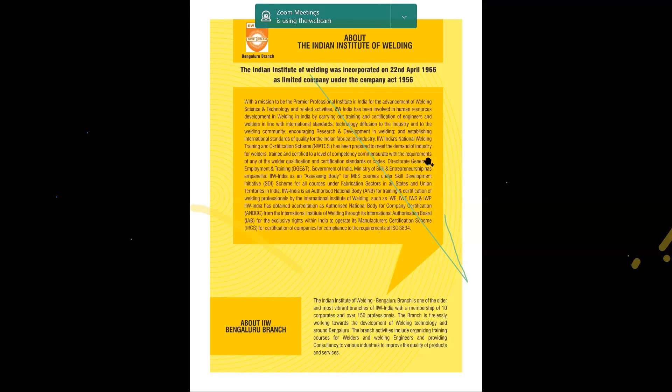Someone is screen sharing. Please don't screen share.

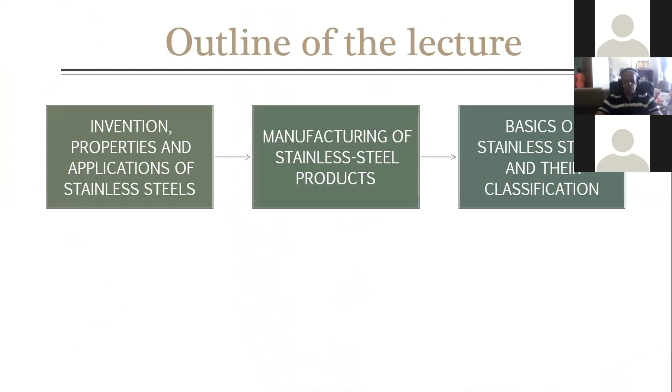Thank you for the introduction, Shukumar sir. I welcome all the delegates of the Indian Institute of Welding, Bangalore chapter, to this technical talk on physical metallurgy of stainless steels. I'll be focusing on the physical metallurgy of austenitic stainless steels for today's talk. Regarding the outline of my presentation, I'll briefly cover the history, properties, and applications of stainless steels, how stainless steels are manufactured, and the basics of stainless steels and their classification.

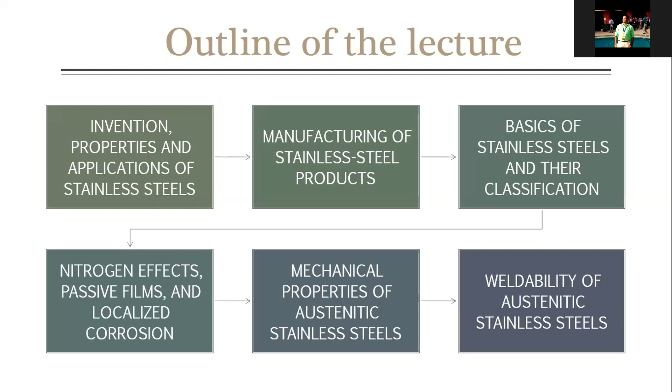I'll also brief about the nitrogen effects, passivation, and localized corrosion that occurs in austenitic stainless steels, and I'll discuss the mechanical properties and weldability of austenitic stainless steels.

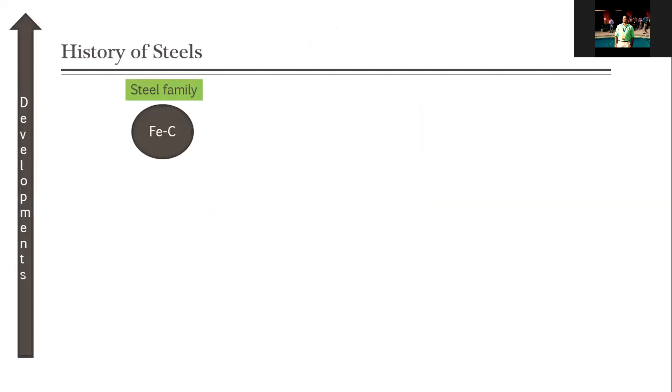Coming to the history, in the steel family, we have three types of steels: carbon steels, stainless steels, and low alloy steels.

A scientist named Harry Brearley invented stainless steels. Actually, austenitic stainless steel was invented in the years 1912 to 1914.

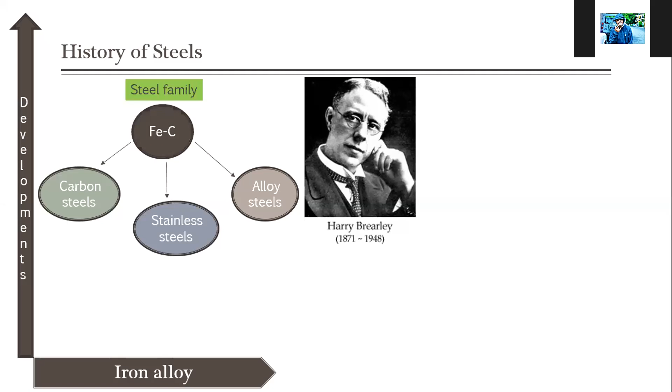Coming to the developments in iron alloy, prehistoric iron is evident in Delhi's iron pillar from around 400 AD, which consisted of iron, carbon, phosphorus, sulfur, and manganese alloy. Coming to further development, iron carbon steels were developed.

After that, alloy steels were developed in the 19th century, and the first patent was made in 1872 for high carbon and high chromium alloy steel. Later, in 1875, low carbon and high chromium steels were developed by Brustlein.

The aluminothermic reduction, that is reduction of carbon in stainless steels, was done in the year 1895 by the scientist called Goldschmidt. Because of this invention, it led to the breakthrough of reducing the carbon content in stainless steel.

Later, further developments were done by adding ternary alloys, that is iron, nickel, and chromium alloys, developed by Guillet in 1904 to 1906.

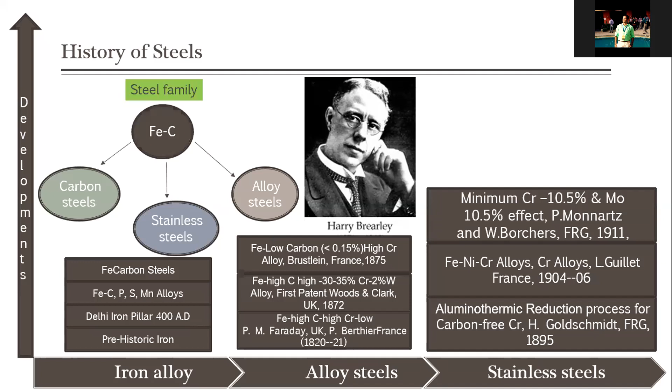Later, molybdenum with increasing chromium content about 10.5%, and its effects, was investigated by Monnartz and Borchers. And later in 1913, the first ever stainless steel was invented by Harry Brearley, as I told you.

Austenitic stainless steel was invented in the years 1912 to 1914 by adding 15 to 40% of chromium, by the scientist named B. Strauss. He invented the stainless steel with the composition of carbon less than 1%, nickel less than 20%, and chromium around 15 to 40%.

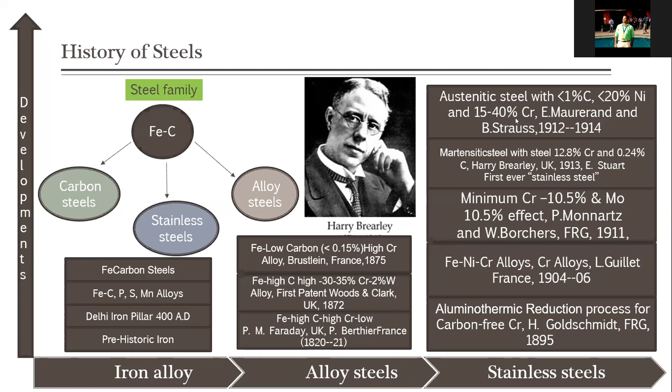This is the brief history of steels.

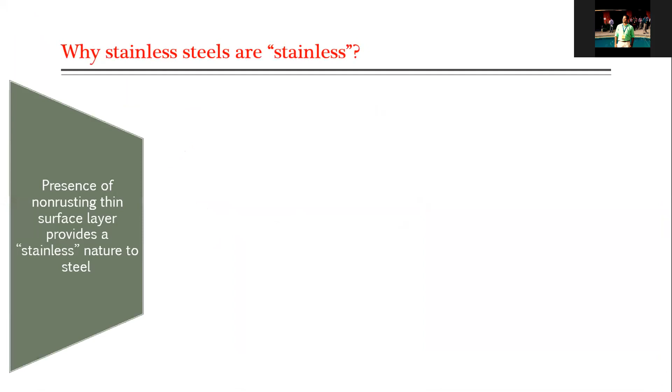And why are steels called stainless? We need to know that steels have a passive layer. The presence of this passive film, which is made up of chromium oxide, makes it stainless and rust free.

Chromium content less than 10.5% makes it not possible to have a passive film; it should have more than 10.5%. In any steel, when chromium content is above 10.5%, we can form a passive layer.

I'll explain later what this passive film is, in the passivation process.

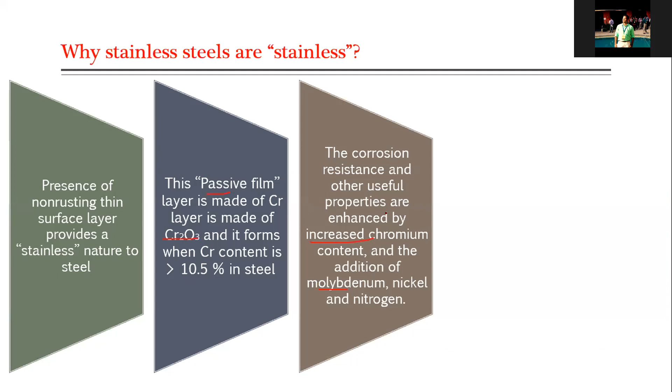The corrosion resistance and other useful properties are enhanced by adding chromium content in steels, and in turn, adding other alloying elements like molybdenum, nickel, and nitrogen will also enhance the corrosion resistance and mechanical properties of stainless steels.

We can see an article from 1915 when stainless steels were invented. According to the author, a non-rusting, unstainable, untarnishable stainless steel was founded, which did not require any polish. This was an article published in the New York Times in 1915 regarding stainless steels.

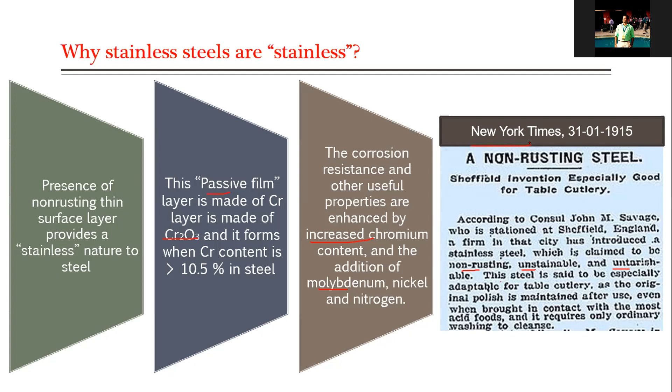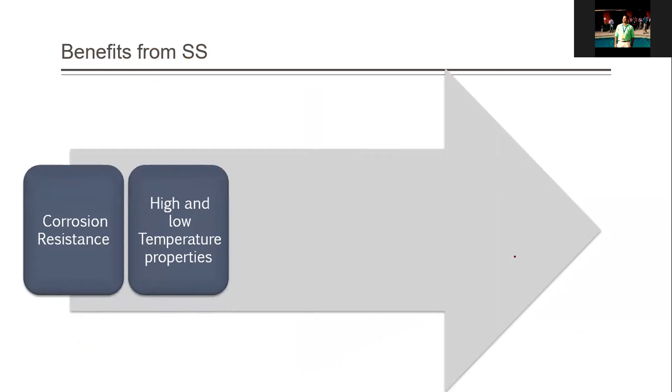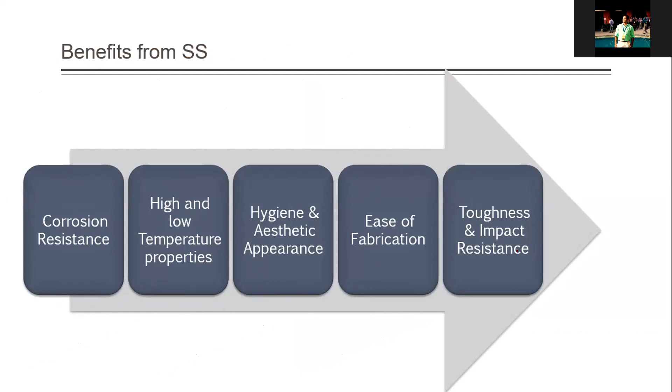Coming to the benefits of stainless steel: it has very good corrosion resistance, very good high and low temperature properties, hygienic and aesthetic appearance, and is easy to fabricate. It is a good formable material, toughness is very good, impact resistance is very good, and cost and life cycle cost is also good. Coming to fatigue property, it has very good creep and fatigue properties also.

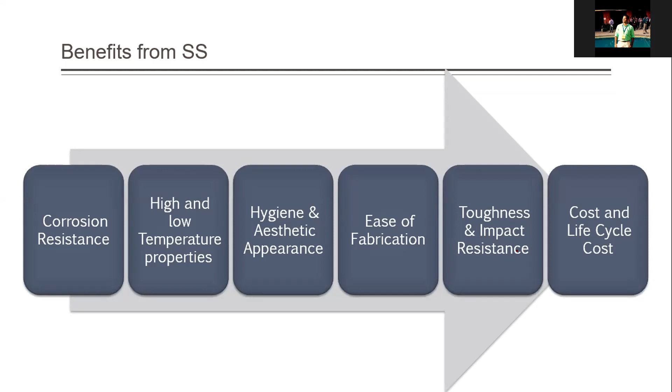Nowadays we can see stainless steel everywhere, right from construction to coins, automobiles, and even in our utensils. Everywhere we can see stainless steels. It has a lot of applications.

We have it in marine applications, desalination plants, petrochemical industries, oil and pulp industries. Wherever we require non-corrosive properties, wherever the environment is corrosive, we usually prefer stainless steels.

Coming to the classification of stainless steels, usually we have 5 types: ferritic stainless steels, martensitic stainless steels, austenitic stainless steels, precipitation hardening stainless steels, and duplex stainless steels.

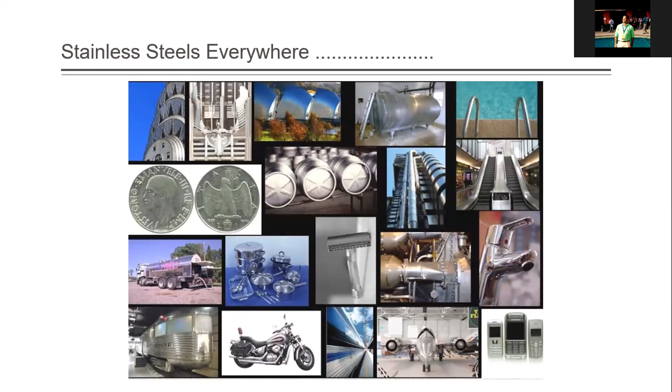Is it visible now? Sorry? Is the screen visible now? Yeah, the classification of stainless steel is not visible. Yeah, I'll come to that. I was talking in general. Yeah. Now it is in. Coming to manufacturing of stainless steel. Yeah. You can go ahead, Dr. Shamant. You can go ahead.

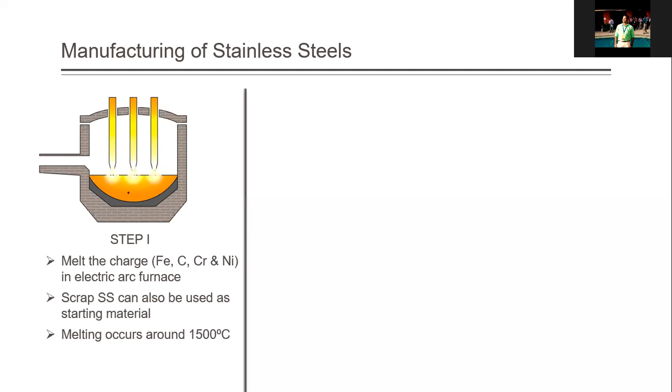Coming to the manufacturing of stainless steels, in general, we use an electric arc furnace in order to cast the stainless steel. The charge will be melted by using the electric arc, and scrap stainless steel also can be used as a metal charge. Melting occurs around 1500 degrees centigrade. Later, after melting, it will be decarburized. That's the main process in stainless steel. We have to remove all the carbon content present in it. Why we have to remove the carbon content, I'll explain later.

Once you melt the charge in your electric arc furnace, it will be transferred to the decarburization vessel, where you blow oxygen, argon, and nitrogen gas in order to reduce the carbon content. We have to reduce the carbon content because of the sensitization problem which occurs in stainless steel. The maximum amount of carbon is limited to 0.03% in the case of austenitic stainless steel. Addition of alloying elements is done in this stage in order to compensate for the effect of carbon.

After decarburization comes solidification. We do the hot rolling process, and then we cut the metal samples. In the case of continuous casting, we do this. And if you require permanent mold casting, the process can be simplified further.

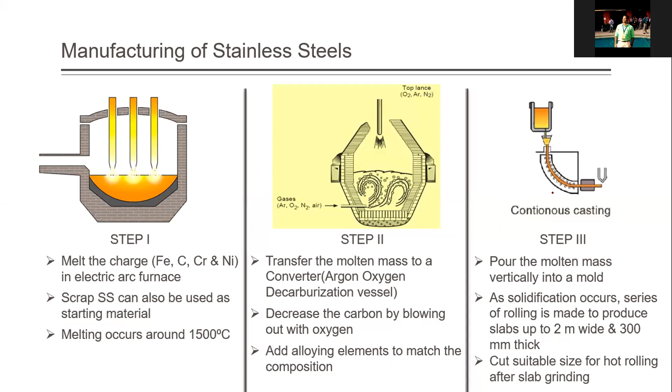Coming to this, in stainless steel it's because of the allotropic nature of iron. Allotropic nature means iron has the capability to change its crystal structure when heated at different temperatures. Say it exists as BCC. When you heat it above 1390 degrees, it exists in delta ferrite form with carbon. If it is heated in the range of 910 to 1390, it exists in the form of austenite with carbon. This is the section where we deal with stainless steels.

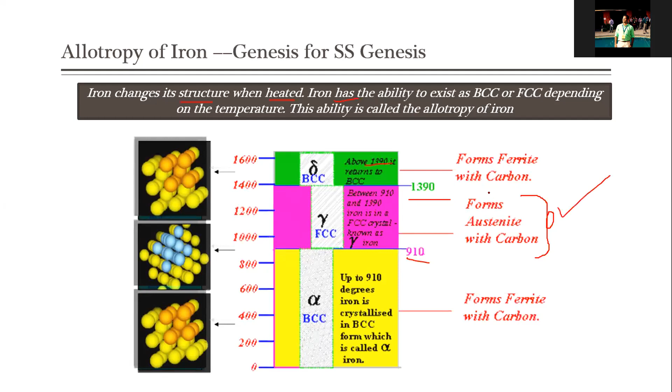We usually have an FCC structure which is non-magnetic. Stainless steels usually come under this category, that is FCC structures. When it is below 900 degrees centigrade, it exists in the form of alpha ferrite. Our focus area is this region, 1000 to 1300 or 1400 degrees centigrade, the range required to produce our austenitic stainless steels.

Coming to the classification, as I told you, there are austenitic stainless steels, ferritic stainless steels, martensitic stainless steels, precipitation hardening stainless steels, and duplex stainless steels. The percentages I've shown here are the market shares in the international market. Usually, austenitic stainless steel has 65 to 70% of the world market share. Next comes ferritic stainless steels, with a market share of 20 to 25%.

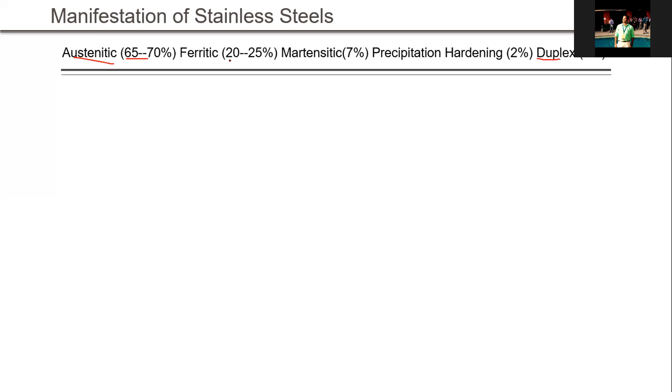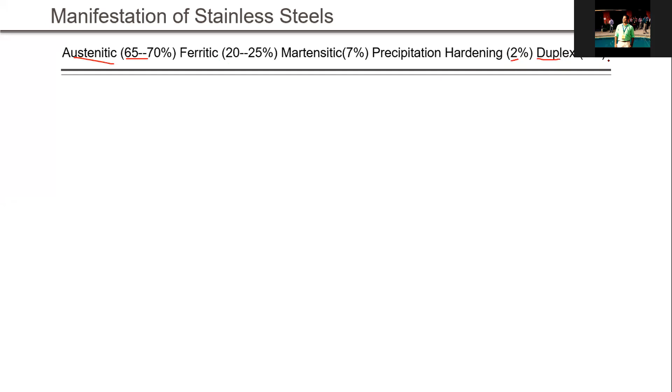Martensitic stainless steels have a market share of 7%. Precipitation hardening stainless steels have a market share of around 2%. Duplex steel has a market share of 1%. Since it is a newly developed alloy, the market share of duplex alloy is on the lower side. It is a recently developed alloy.

If you have chromium between 12 to 15%, then you get martensitic stainless steel. This type of phase is very helpful in enhancing strength and toughness. If you have the martensitic phase in your structure, then it is hardenable. It is heat treatable also. You can harden it.

Coming to ferritic stainless steels, when you maintain carbon less than 0.1%, chromium more than 18%, and no nickel, you arrive at a ferritic structure. In austenitic stainless steels also, you will have 5 to 10% ferritic structure: 90% will be austenitic phase and 10% ferritic phase. In ferritic stainless steels, 90% of your structure is made up of ferrite.

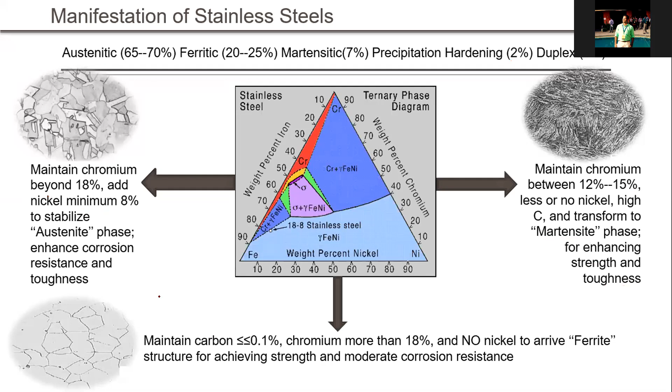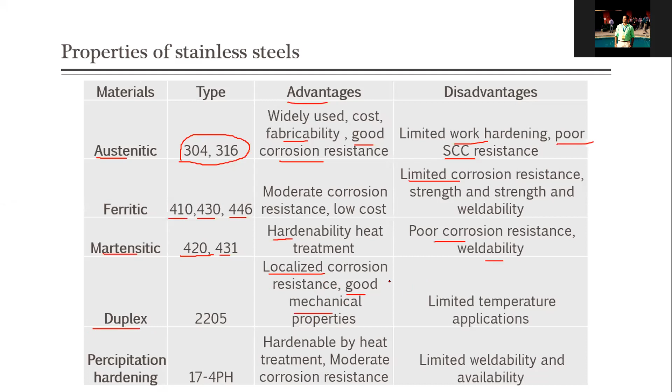And coming to the newly developed duplex alloy steel, it has very good localized corrosion resistance. That is, resistance to pitting and crevice corrosion is very good in duplex stainless steels, and it has good mechanical properties also. When compared to austenitic stainless steels, the mechanical property of duplex stainless steels is very good, and the corrosion resistance also is very good. The only limitation of duplex stainless steel is its limited operating service temperature.

Austenitic stainless steel's operating or service temperature is around 800 degrees, whereas in duplex steels it is limited to 300 degrees. Above 300 degrees, we cannot rely on duplex stainless steel because various precipitates form above 300 degrees centigrade in duplex stainless steel. Hence, this is the major limitation of duplex stainless steels compared to austenitic stainless steel. Comparing corrosion resistance, it has very good corrosion resistance because of enhanced chromium content in it.

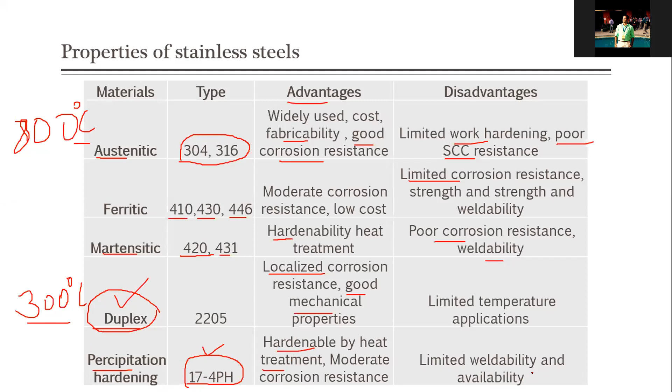And next we have precipitation hardening steels, where the commonly used grade is 17-4 PH. This is the commonly used precipitation hardened steel, and it is hardenable by heat treatment. The main advantage of precipitation hardening steel is it can be hardened by heat treatment, and it has moderate corrosion resistance. The major limitation is it has limited weldability, and availability is also very limited. This is the property of stainless steel.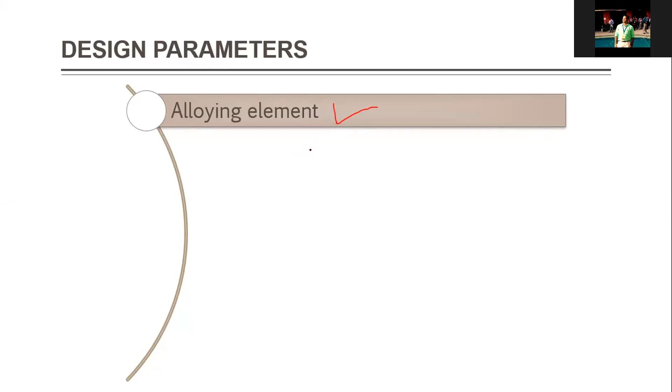And coming to the design parameters of austenitic stainless steel, alloying element is the first part in designing any alloy or any stainless steel. Alloying element is the first important criterion that we have to look into. I'll be discussing in detail the effect of alloying elements. And grain size: grain size engineering is also very important in defining the corrosion and mechanical properties.

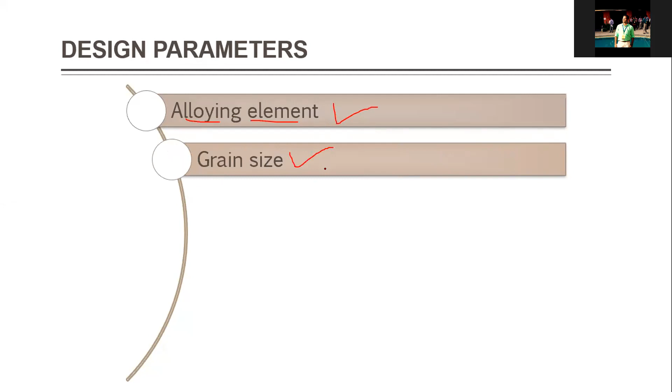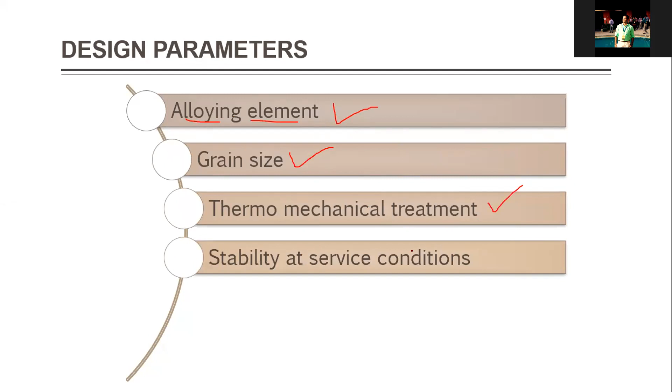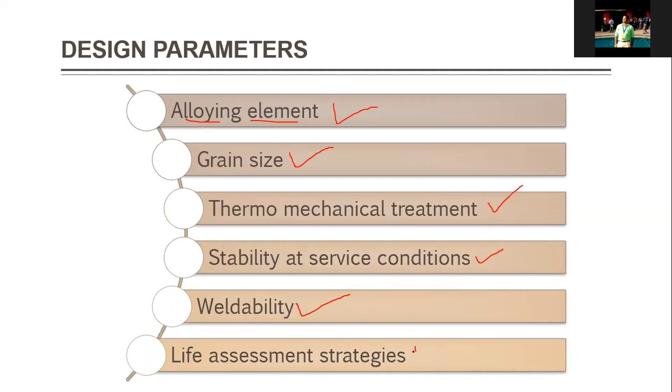And thermomechanical heat treatment. Heat treatment is also very important in designing a stainless steel for a particular application. And stability at service conditions also has to be checked before using it in working condition. And weldability of the alloy being designed should also be checked thoroughly. And life assessment strategies like fatigue and creep should also be very good before designing the alloy.

Coming to the effect of alloying elements, the first thing is carbon. Carbon is usually present in all ferrous metals, and usually carbon is added around 0.02 to 0.05%. 0.08% of carbon is present in austenitic stainless steel, and carbon, as we all know, is a non-metallic element. As you can see in this image, this is a graphite flake, image courtesy of Mines Paris. And carbon, as I told you, will always be present in metallic alloys, in all grades of stainless steels and heat resistant steels.

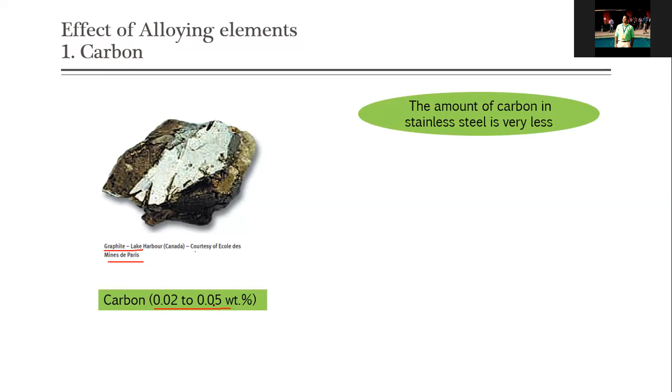You usually have carbon, but in case of austenitic, ferritic, and duplex stainless steels, the maximum amount of carbon is limited to 0.05%. Sorry, 0.01%. Okay, and coming to austenitic stainless steels, you can find carbon in the range of 0.02 to 0.05%. And carbon is not essential in stainless steel because of sensitization problem.

Because if you have more carbon in your alloy, what happens is it extracts all the chromium content in it to form the chromium carbide precipitates near the grain boundaries. Hence, carbon is completely eliminated from stainless steels. If you have this sensitization problem, then you will have decrease in corrosion resistant property. Hence carbon is avoided in stainless steels. The amount of carbon will be very less in stainless steels.

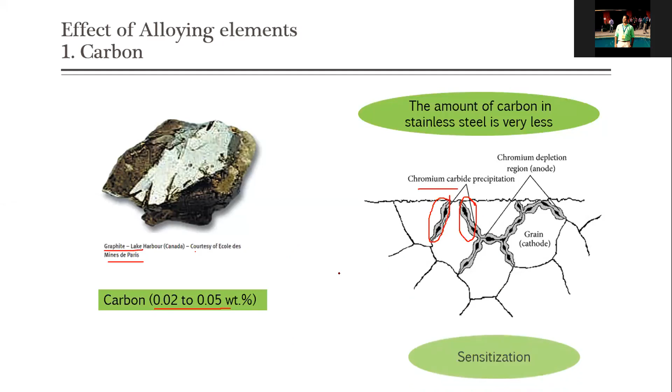Coming to the chromium content, chromium is a very important alloying element in stainless steel. You can see the image of chromite ore, which is again taken from the Paris mines. The chromium content in austenitic stainless steel is present around 16 to 18%. Coming to the metallurgical application of chromium, about 85% of chromite mine is used in metallurgy, namely in stainless steels or low alloy steels, high strength steels, tool steels, and high performance alloy steels. Because of its high resistance to corrosion, this is a very important alloying element in stainless steels.

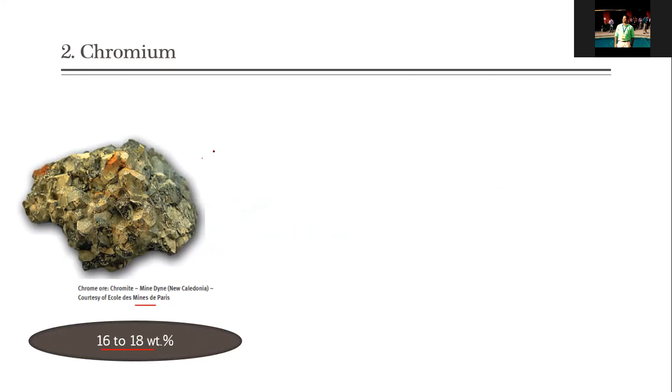One way that we can distinguish stainless steels is by the amount of chromium content in it. Usually the chromium content present in it will give us a protective layer called passive layer, which is protecting the stainless steels from corrosion. Chromium is having high degree of reactivity. On this basis, the effectiveness of chromium as an alloying element in stainless steel is very important.

The resistance of these metallic alloys to chemical effects of corrosive agents is determined by the ability to protect themselves through the formation of adherent and insoluble film, that is, chromium oxide layer. That process you usually call the passivation process. Once your chromium atom reacts with oxygen, when you subject it to atmosphere, you will have a thin oxide layer formed on the surface of the steel, and that layer will be in the nano level, around 0.1 to 2 nanometers.

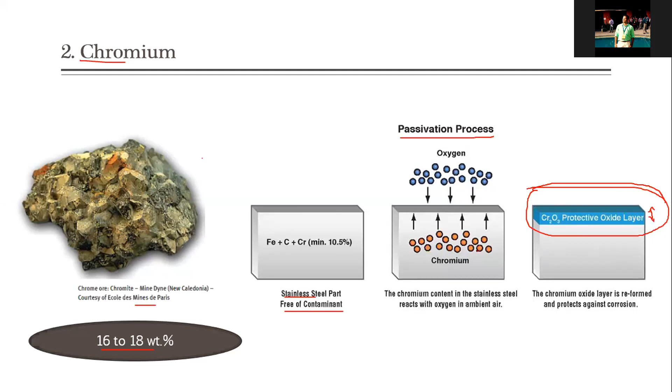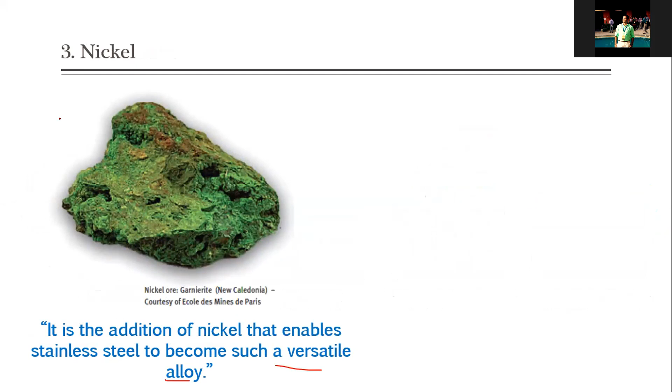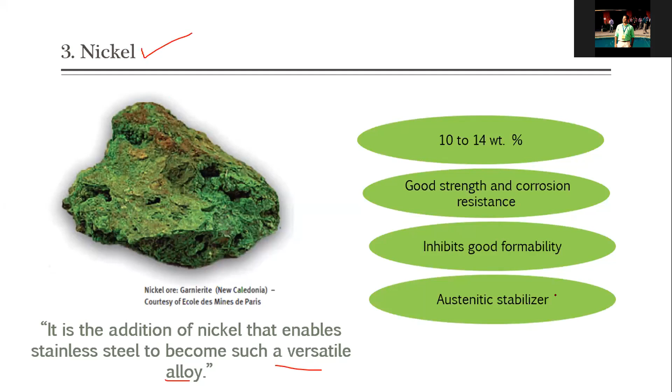The next important alloying element that we find in austenitic stainless steel is nickel. It is the addition of nickel that enables stainless steel to become such a versatile alloy. Usually you have 10 to 14% of nickel content in austenitic stainless steel, which enables it to have good strength and corrosion resistance, and it also gives good formability. The machinability property of austenitic stainless steel is affected by addition of nickel, and it is a major austenite stabilizer.

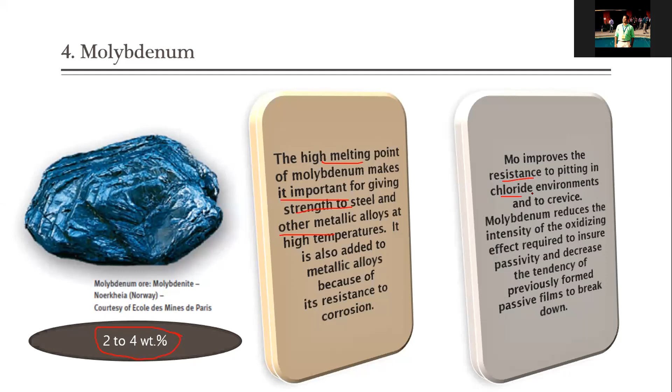Coming to molybdenum, usually you have around 2 to 4 weight percent of molybdenum in austenitic stainless steel, and molybdenum has a very high melting point. Because of this property, it is important for giving strength to the steel and other metallic alloys, and it also helps in providing good corrosion resistance. Molybdenum improves the resistance to pitting in chloride environments and crevice corrosion, and it helps in reducing the oxidizing effect.

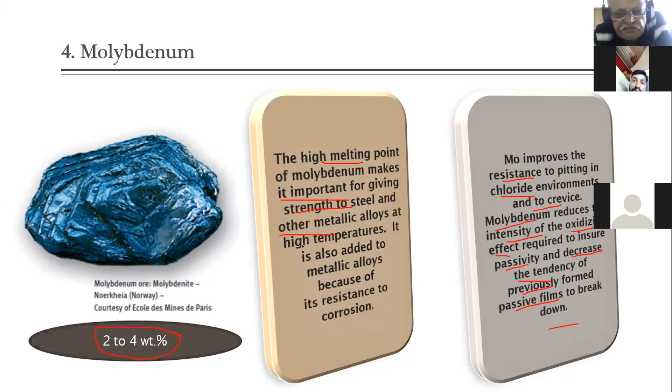Molybdenum will also help in reducing the intensity of oxidizing effect, which is very much essential to ensure passivity and decrease the tendency of previously formed passive films to break down. If you have molybdenum content in your stainless steel, then the passive layer will also be very strong. And the next important alloying element is nitrogen. Nitrogen is an interstitial element in steel, as we all know.

And sorry, because the size of the nitrogen atom is so small compared to the size of chromium or nickel or iron, it is very small. The atomic size of nitrogen is very small. Hence, it is an interstitial atom which can enter into these alloys.

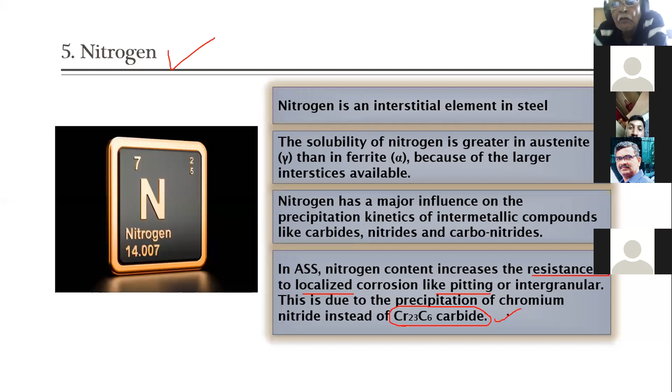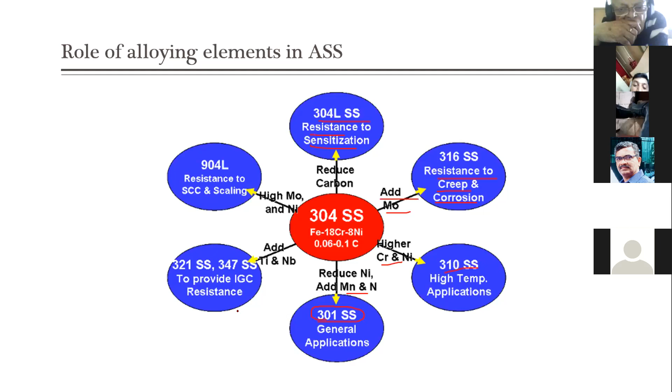If you have higher chromium and nickel, then you get 310 SS, which has high temperature applications. If you reduce nickel and add manganese and nitrogen, then you get 301 stainless steel, which is used in general applications, and the cost of 301 stainless steel is also very low. If you add other alloying elements like titanium and niobium, you get 321 SS and 347 SS, which have very good intergranular corrosion resistance.

If you add molybdenum and nickel to the 304 alloy, then you get the 904L grade, which has good resistance to stress corrosion cracking and scaling. These are some of the commonly used grades of austenitic stainless steels. If you have lower carbon, you get 304L. If you have more molybdenum, you will have 316 SS. And if you have higher chromium and nickel compared to 304, you will have 310 SS.

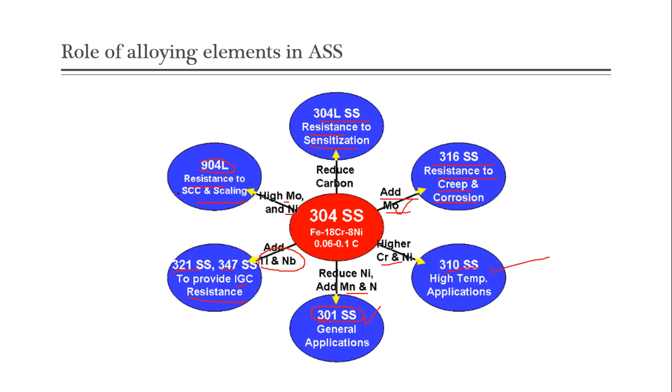If you have reduced nickel and increased nitrogen, then you get 301 SS. If you add titanium and niobium to your iron, chromium, and nickel alloy, then you get 321 SS and 347 SS. And if you have high molybdenum and nickel content, then you get 904L SS, which has very good resistance to stress corrosion cracking and scaling.

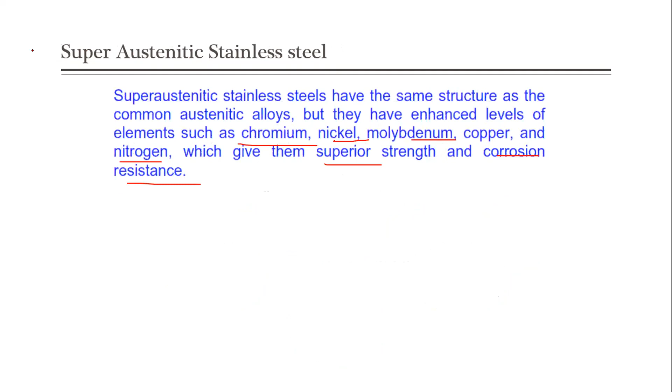The next important austenitic stainless steel we have is super austenitic stainless steel. It has a microstructure similar to the austenitic alloy, but alloying elements such as chromium, nickel, molybdenum, copper, and nitrogen are enhanced in order to get superior strength and corrosion resistance. The cost of super austenitic stainless steels will also be on the higher side. You can see the alloying elements that you can add.

See, around 23 to 25% nickel will be added, whereas in conventional 316 ASS, the nickel is limited to 10%, whereas in super austenitic stainless steel, the nickel content will be around 23 to 25%. And the chromium content also is enhanced: in commonly used 316 alloy, you will have around 18% of chromium. Here you will have 22% of chromium.

And the molybdenum also is increased in super austenitic stainless steel. Here you are adding around 6 to 7% of molybdenum, whereas in conventional 316 alloy, it will be around 3 to 4% of molybdenum. And you will have almost nil carbon in super austenitic stainless steel. The maximum amount will be around 0.03%, and nitrogen will be around 0.18 to 0.25%. In case of 316, you will have nitrogen content around 0.15%, and the rest are nil. If you have any specific application which requires toughness, then you add some amount of manganese also.

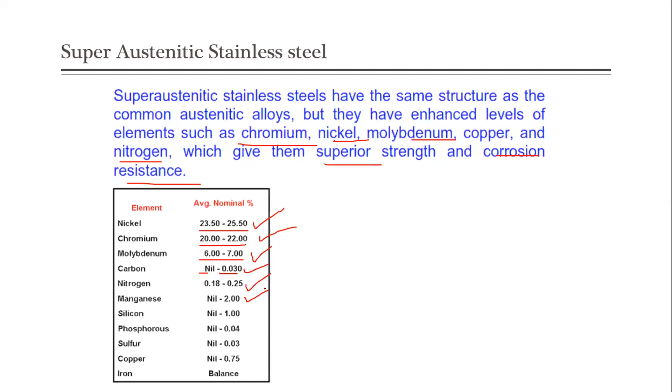Typical applications of super austenitic stainless steel are in pulp bleaching equipment and piping, seawater exchangers, chemical process tanks, pipelines, brewery equipment, reverse osmosis desalination equipment and pumps. It is also being used in offshore oil and gas process systems, food processing equipment, and pharmaceutical process pipelines and vessels. Where you need superior corrosion resistance and strength, you use these super austenitic stainless steels.

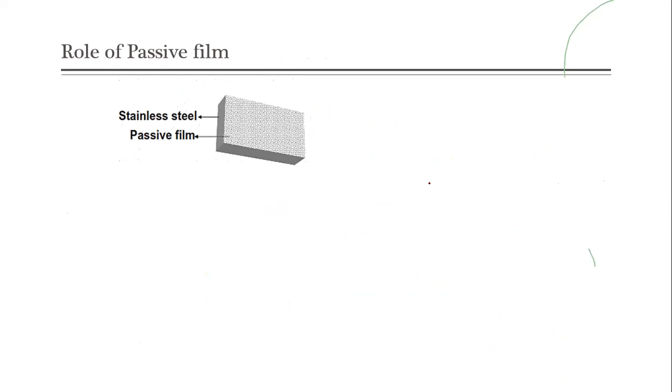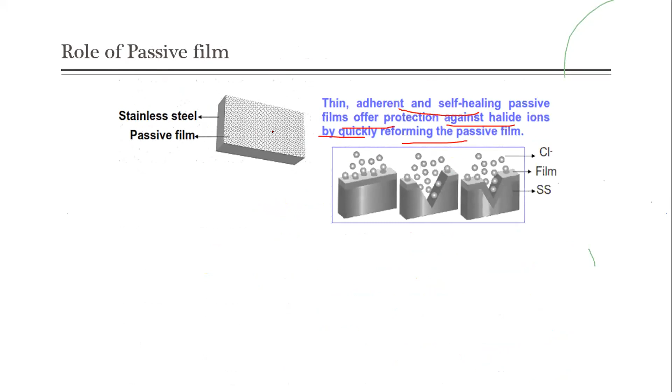As I told you, the role of the passive film is very important in stainless steel. Here a thin and self-healing passive film protects against aggressive ions by quickly re-forming. This self-healing passive film protects the surface from surface damage and localized corrosion. It helps in preventing minor surface damage and greatly helps in increasing the localized corrosion resistance, because the passive film will be corroded first, and then the corrosion will enter into our base metal.

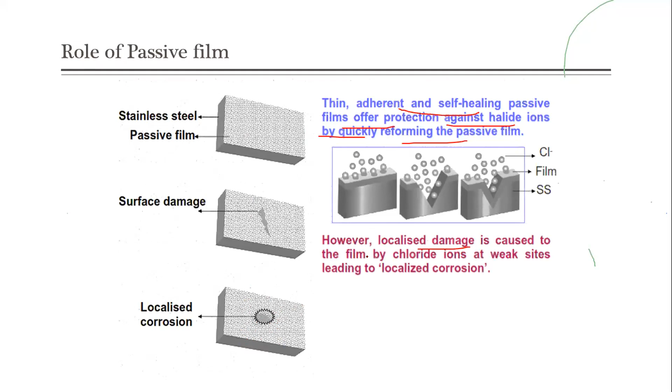However, localized damage is caused to the film by chloride ions at weak sites. This localized corrosion is usually found in the weak sites of the passive film. Localized corrosion like pitting and crevice corrosion, intergranular corrosion, stress corrosion cracking, corrosion fatigue, etc. are caused due to the destruction of the passive film. In ASS, in order to have damage due to corrosion and fatigue, first you have to overcome this passive layer. Only after destruction of this passive film will the failure of our SS occur.

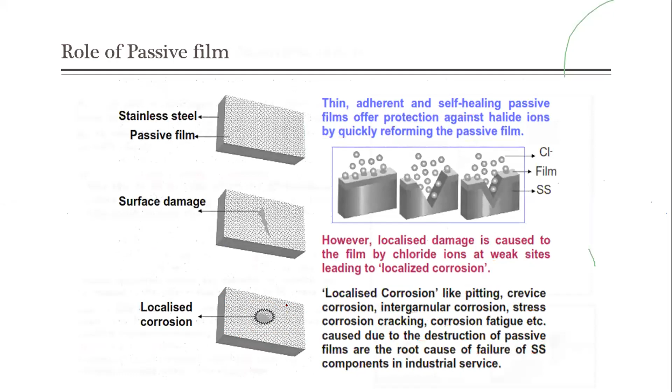In industrial services, coming to pitting corrosion, the passive film is damaged by chloride ions. Usually the stainless steels will be subjected to corrosive environments. Wherever you have aggressive environments, you use these stainless steels, right? The passive film generated in the austenitic stainless steels will be damaged by the chloride ions at local defects, and pitting is initiated, and it grows by an autocatalytic mechanism, leading to the growth of pits.

How to improve pitting corrosion resistance is by adding molybdenum, nickel, and nitrogen. If you have more molybdenum, nitrogen, and nickel in your alloy system, then the pitting corrosion kinetics will be reduced. You can also do some surface treatment, like laser melting or surface alloying, in order to reduce this pitting. And you can also add inhibitor to the corrosive medium in order to reduce the pitting corrosion.

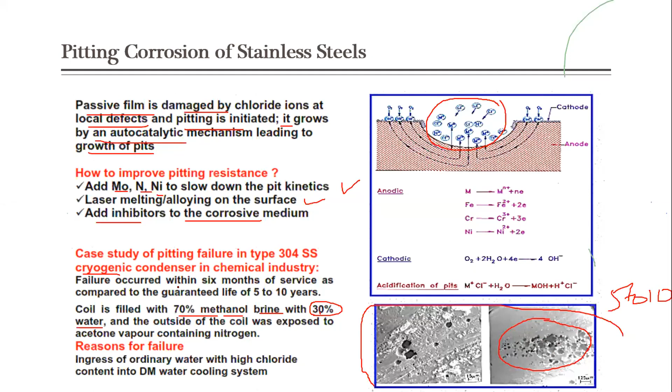Coming to intergranular corrosion, it mainly occurs because of sensitization. Formation of chromium-rich carbides at the grain boundaries during slow heating or cooling of austenitic stainless steels between 400 to 750 degrees centigrade leads to the development of a chromium-depleted zone, which is a sensitized layer along the grain boundaries known as sensitization. This intergranular corrosion mainly occurs because of sensitization.

Any sensitized microstructure will undergo selective localized corrosion. If you have a sensitized layer or a sensitized structure in your microstructure, it tends to have intergranular corrosion in austenitic stainless steels.

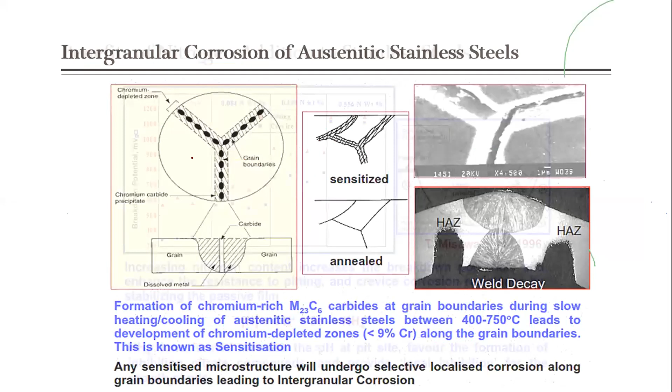If you increase the nitrogen content, the enhanced breakdown potential will be increased, which will in turn enhance the resistance to pitting and crevice corrosion by stabilizing the passive film. If you add more nitrogen into your alloy, you will have a strong passive film that cannot be corroded easily. Usually, if you have higher nitrogen content, you can form NH4 ions.

This increases pH at the pit site, which will favor the formation of nitrate compounds and provide local inhibition for the growth of pits. Hence, nitrogen is a very important alloying element in stainless steel.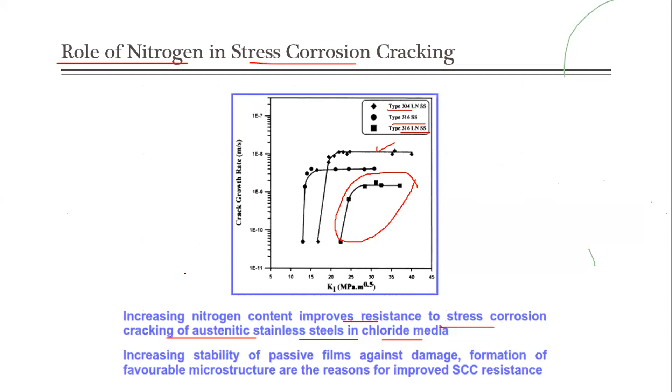Increasing the nitrogen content improves the resistance to stress corrosion cracking in austenitic stainless steels in chloride medium. If you increase the nitrogen content, you will have very good resistance to stress corrosion cracking, and also increase the stability of the passive film against damage. You can get a favorable microstructure for good stress corrosion cracking resistance if you have higher nitrogen content in your austenitic stainless steels.

Coming to intergranular corrosion, here you can see the TTT diagram, that is time-temperature-transformation diagram, for 0% cold work, 5% cold work, and 10% cold work samples. The carbon and nitrogen contents have been taken here: the first indicates 0.054% carbon and 0.053% nitrogen, that is 316 alloy, where they designed for different amounts of carbon and nitrogen.

For the second alloy, they chose 0.043% carbon and 0.075% nitrogen. For the third alloy, they chose 0.03% carbon and 0.086% nitrogen. They studied the time transformation curves for 0%, 5%, and 10% cold work.

They found cold working up to 15% reduces the time to initiate sensitization. Hence, we have to cold work the austenitic stainless steel sample, which in turn reduces the time to initiate sensitization. Reduction in carbon and addition of nitrogen increases the transformation time.

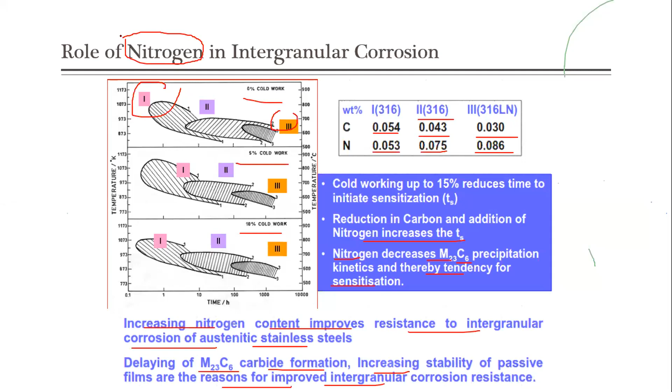Increasing nitrogen content improves the resistance to intergranular corrosion of austenitic stainless steels, and it also helps in delaying carbide formation. It increases the stability of passive films, and the reason for improved intergranular corrosion resistance is the addition of this nitrogen atom. Nitrogen is a very important alloying element for enhancing the corrosion resistance of austenitic stainless steels.

Coming to grain boundary engineering, as you can see in this image, if you have uniform grain boundaries, the sensitization time required is 200 hours. If you have non-uniform grain boundaries, the sensitization time required is more than 2000 hours. Hence, while designing an alloy to have good corrosion resistance, we should have non-uniform grain size. If you have uniform grain size, then the tendency for sensitization will be more.

They took two alloys and chose an intermediate warm working temperature during the annealing and rolling process. They engineered one alloy to have uniform grain size, and with the same working condition, they engineered the other for non-uniform grain size by selecting proper temperatures. Grain boundary engineering is thus very important to minimize the sensitization problem.

The percentage of coincidence site lattice, which we usually call CSL, will be increased to 70% in alloy B, whereas the time for sensitization also increased by 10 times. If you have non-uniform grain boundaries, the time for sensitization required is also increased by 10 times. Sensitization resistance increases with the increase in low angle coherent boundaries, which also help in increasing the sensitization time.

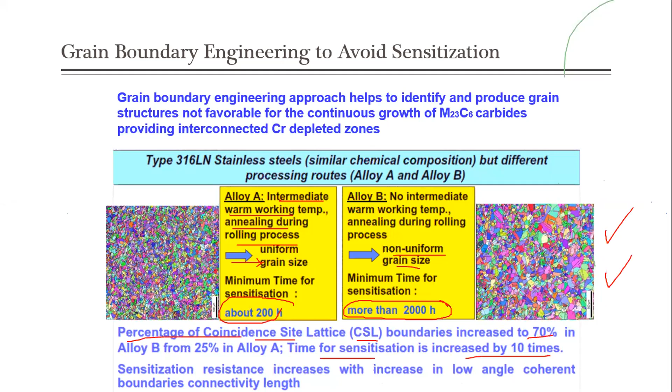The next important problem associated with austenitic stainless steel is biocorrosion, commonly called MIC, that is microbiologically influenced corrosion, caused by bacteria or atmospheric conditions where these austenitic stainless steels are being used. They usually tend to have biocorrosion on them.

Here you can see some corrosion that has happened due to Gallionella bacteria, and the biofilm formed because of it. This occurs when we subject the steel to a highly aggressive environment. Usually the applications of austenitic stainless steels are in aggressive environments with a lot of carbohydrates present, such as food processing industries and some other industries, where you will have a lot of bacteria influencing the corrosion attack, which we call microbiologically influenced corrosion.

You will have bacteria doing immobilization on the passive film, forming a biofilm over it, which in turn causes crevice attack on the sample. These are some examples where we see biocorrosion. Here you can see biocorrosion on the SS weld also, because of Gallionella mounds present, which is a main bacteria causing corrosion in our welds.

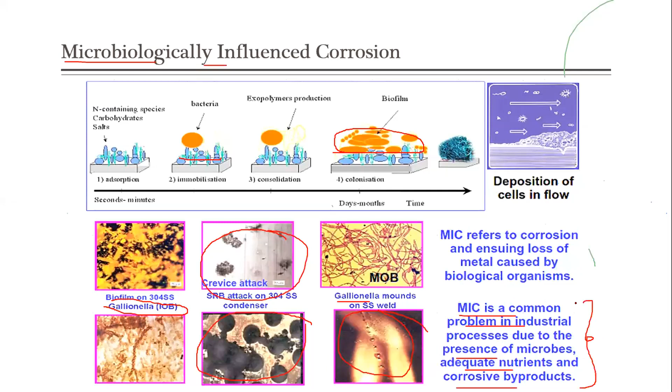Coming to the mechanical properties of austenitic stainless steels, usually we have a yield strength and tensile strength of around 480 to 600 MPa. As you can see in this stress-strain curve, austenitic stainless steel has good ductility. Coming to the strength part, usually our martensitic stainless steel has very good strength, whereas coming to formability or ductility, austenitic stainless steel has the good ductility part.

Usually it has a yield strength of around 300 and tensile strength around 580 to 600, and this again depends upon the alloying elements. The percentage of elongation and the strength depend upon the alloying elements again. If you have more molybdenum, you get good tensile strength; if you have lesser molybdenum, the tensile strength will be less. You can also add manganese into the alloying elements in order to increase the strength properties.

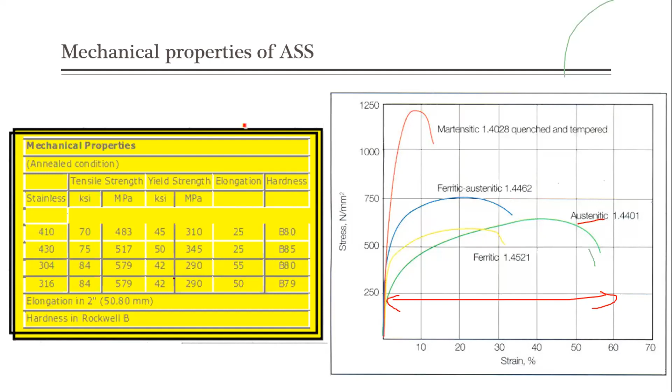You can see in this diagram the increasing corrosion resistance versus increasing strength for the various grades available for austenitic stainless steel. Type 316 has very good corrosion resistance, whereas 440, which is usually martensitic type, has good strength but the corrosion resistant property is very low. If you require corrosion resistance, you have to compromise with strength. These are the various available steels, which can also be customized.

Custom 450 is a customized stainless steel where you can have good corrosion resistance and strength property also. 465 is also a customized steel, and 475, 455 are some of the customized steels which can have very good strength and corrosion properties also.

Coming to the operating service temperatures for stainless steel, the operating condition for austenitic stainless steel is around 925 to 1150 degrees centigrade. This is the continuous service temperature of austenitic stainless steel. Because of this property, austenitic stainless steel has very good applications, since the continuous service operating temperature is very good in this case.

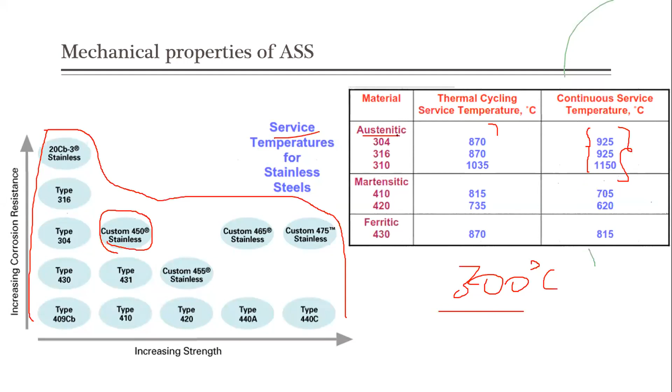Coming to the weldability of austenitic stainless steel, as we all know, it is a readily weldable material, but it results in a heterogeneous microstructure. The main problems encountered during welding are hot cracking and sensitization at the heat affected zone. These are the two main problems encountered during welding of austenitic stainless steels.

In order to avoid weld imperfection, although austenitic stainless steels are readily weldable, heat affected zone cracking can occur. In any metal, we usually have a heat affected zone where there is a tendency for cracking. Weld metal solidification cracking is more likely in fully austenitic stainless steel. When you have a lesser amount of ferritic phase in your austenitic stainless steel, you have more tendency of cracking in the heat affected zone.

Hence, you have to engineer the alloy in such a way that you should have a minimum of 5 to 10% ferrite phase in the austenitic stainless steel. This way you can accommodate hot cracking, or any weld imperfection can be accommodated by this ferritic phase during welding.

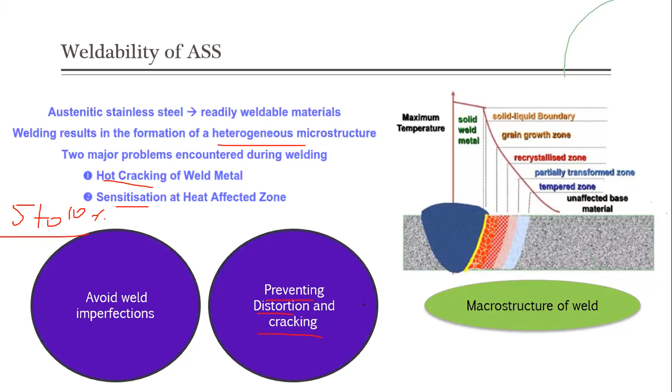It usually occurs at temperatures below 800 degrees centigrade, around 500 to 700 degrees centigrade. This is where the sensitization problem occurs, so welding temperature should be carefully monitored. An alternative way to avoid this formation of chromium-rich carbides is by using argon gas shielding. By using argon gas shielding during welding, we can avoid this deterioration of properties.

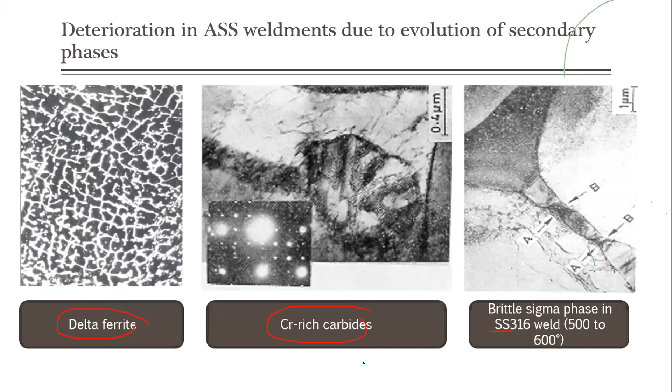And the three main reasons, as I told you, for precipitation of these undesirable phases are too much heat generated during welding, low travel speed, and inadequate shielding. If you use argon gas shielding for welding of these ASS weldments, you can avoid the formation of chromium-rich precipitates, and you can also avoid the sensitization problem.

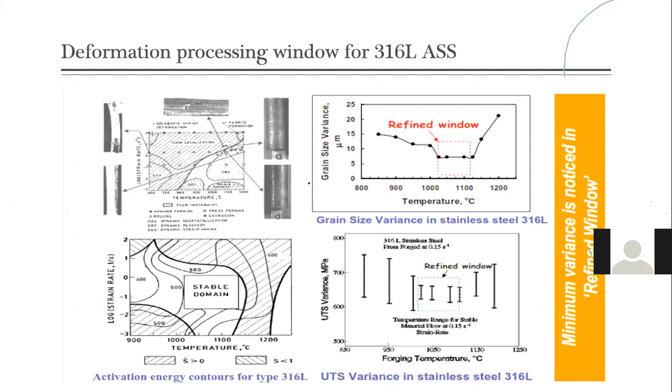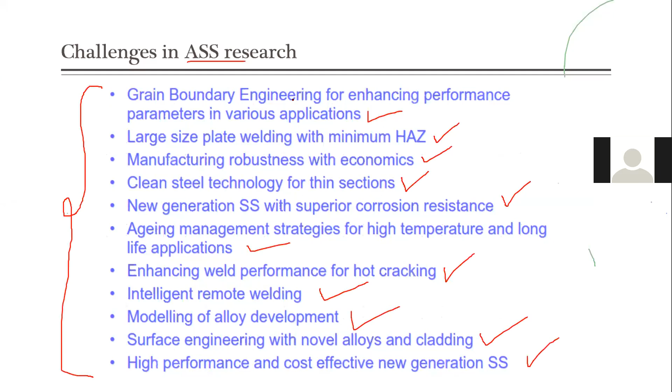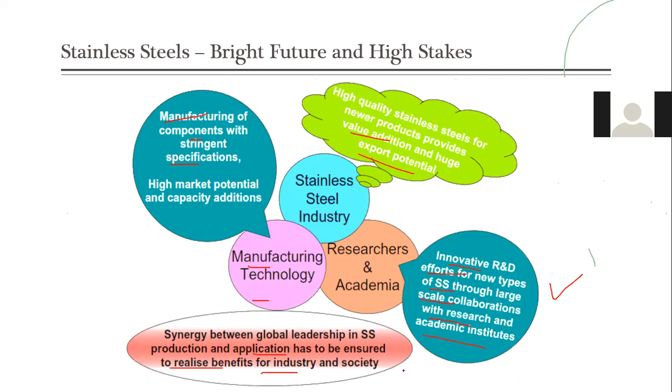Synergy between global leadership in SS production and application has to be ensured to realize the benefits for industry and society. And these are some of the references for further study.